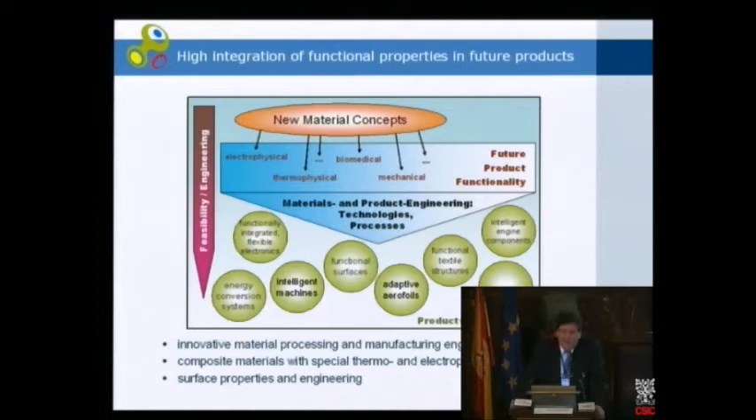And as a German citizen, I know quite well what I'm talking about. Therefore, in these few minutes this morning, I will have a close link to advanced ceramics in advanced mechanical engineering applications.

We had a short talk during the coffee break with Professor Moya yesterday, and the subject was how are new things, new material concepts getting to be a product and coming to the market. And with this draft, I will try to show you it's much more complex.

Material science is just one issue. We have plotted the engineering relevant in red. You see, it is a quite complex scheme how to create a product, but also how to bring it to the market.

And for sure, what we need is the human being, where we have the ideas, where we have the creativity, where we have the basic motivation.

But we have also to think about what is going on in the market. That means quite different disciplines that are not originally taught and learned by the material scientists.

And I want just to use these few minutes to make you a little bit more sensitive and aware what will be the challenge whenever you will come to a position in an industrial environment where you have to take responsibilities and not just producing papers and data.

Professor Kaplan, one of my colleagues in industrial management, he was talking quite harder than you did. He said, some of the papers we have here on the desk, their only value is their caloric value. That means when you burn them.

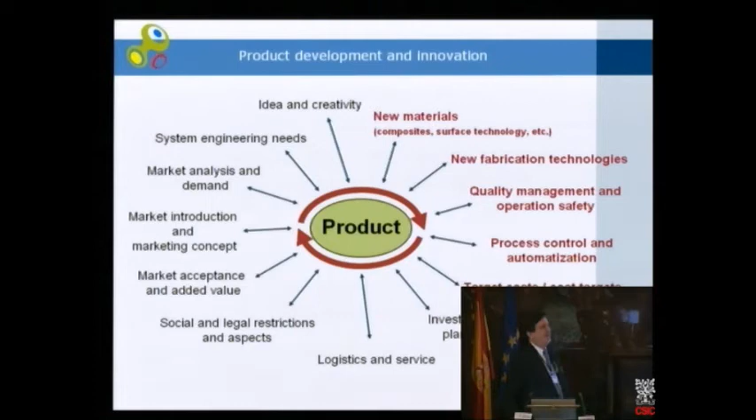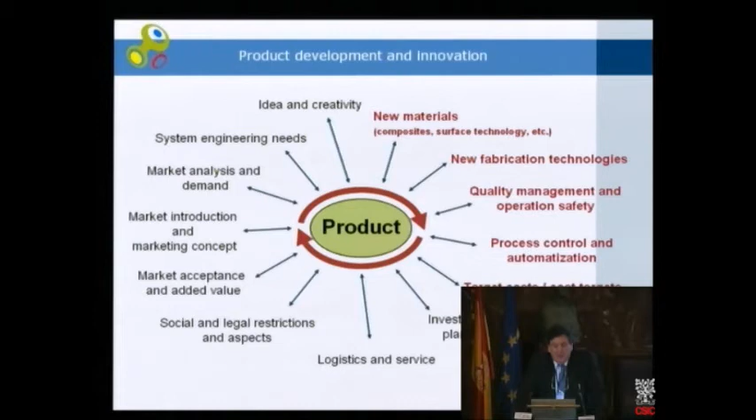And you all may be aware that we have to face similar problems if we are working with nanomaterials. We need special safety standards in handling, in compounding, and again for all the process chain. Why are people choosing ceramics? You all know about the advantages of ceramics. We all use these facts in our introductory remarks wherever we gave a plenary talk.

But on the other side, we have not only to face the problems with their brittleness. I will not take so much time with this subject. And we learned in a very impressive way about the importance of local stresses and stress distributions in the first paper this morning. But there is a different challenge, because in a product you have a geometry, you have a shape, you have tolerances of the material. It is not enough just to think about the material's properties, but about the component. That makes a big, important difference.

And therefore we have to work hard to develop the most appropriate manufacturing techniques, or the set of techniques we apply. And this for sure includes the compounding, the forming and shaping, and all the thermal process engineering. And last not least, what remains is the effort for the machining in the final state. That means in the sintered state, the handling of hard and super hard materials.

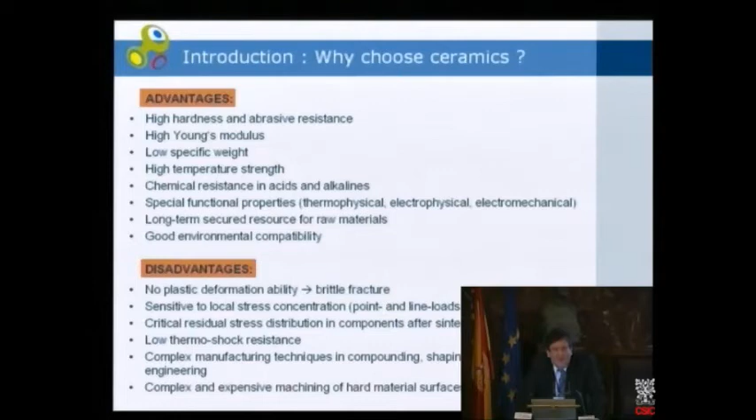And what is the reason for that? We all together have to share the responsibility for this situation, and that is the mismatch between the requirements of material science and engineering on one side and industrial product development and process engineering on the other side.

With all these drawbacks and risks in the application of structural ceramics, we have to think which can be the most appropriate strategies. First, to improve the mechanical, but also further specific properties of ceramics. And again, I'm not talking about materials, I'm talking about components, whatever may be their size or their design. And for sure, there is the classic approach, the microstructural optimization, and this is not old stuff.

We should apply some of the philosophy of Kaizen, the continuous improvement process. Sometimes we should be modest and also accept to achieve improvements by small steps. But many, many small steps give us serious progress. Not just big words, big challenges, and no achievement.

We have learned this morning about the incorporation of additional solid phases. I said it in a very abstract way here, because we can talk about ductile phases like metals, we have seen it this morning, or we can use the zirconia toughening effects by phase transitions, stress-induced phase transitions.

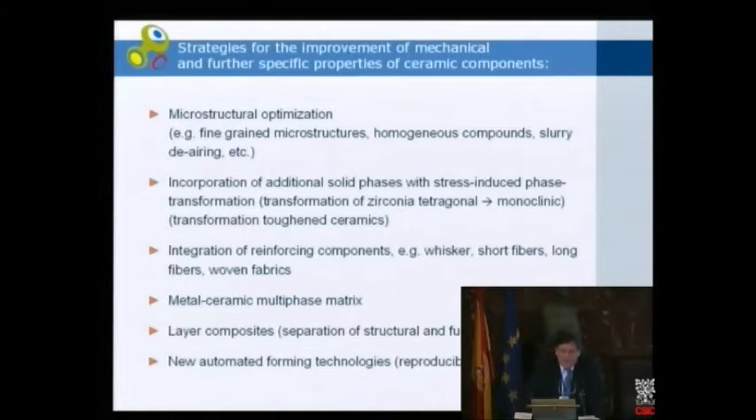As material scientists, you are well aware of these various strategies, just to keep in mind how the microstructures of these materials may look. The standard but modern fine-grained alumina as a structural material. Then we can have the structural refinement on the conventional track using submicron aluminas.

We can use a transformation toughening effect, and that makes it easy for me in the second presentation, as you are still sensitive to these oxide, non-oxide, micro-nanocomposite materials. And the same may happen in the combination of different non-oxide ceramics. So what remains is to think about the processing route.

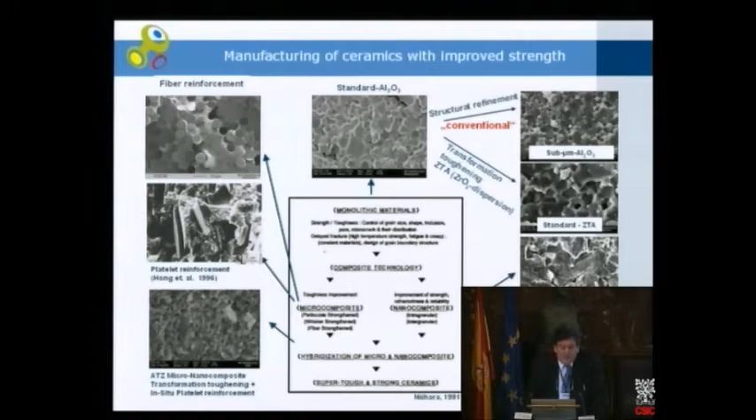And it is quite easy to estimate that for an endless fiber reinforced ceramic structure, we need completely different forming and shaping, and also compounding techniques, than for a traditional powder ceramic or powder metallurgical part.

So if we stay a little bit away from our own background in material science, and we try to take the coat of the customer, that is the person who should pay for our product, then we should summarize what may be the most important customer demands to ceramic components. And again, not to ceramic materials, to ceramic components. And for sure, there is the high mechanical strength, there is the good abrasive and chemical resistance, there is the high temperature strength, and hopefully the good creep resistance.

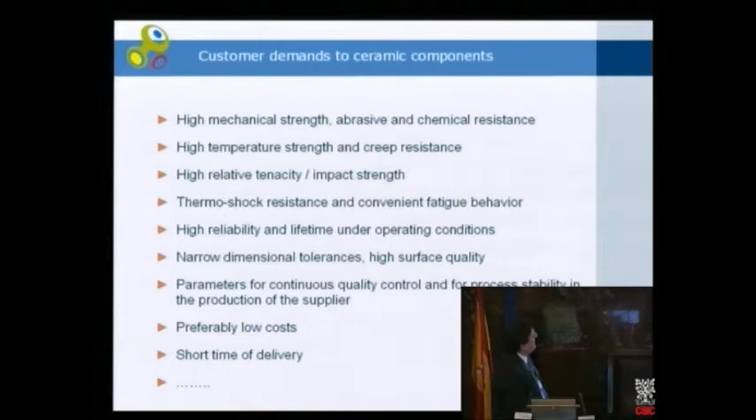And a little bit later we see we leave these typical material features, and there is such a word like dimensional tolerances, surface qualities. How to measure that? And you see, you need a different education, you need different tools, and you need a different understanding. And the second is to understand which are the key parameters in all these process steps of the process chain. And at the very end, we have to calculate the economic effect of all these means and methods we employ.

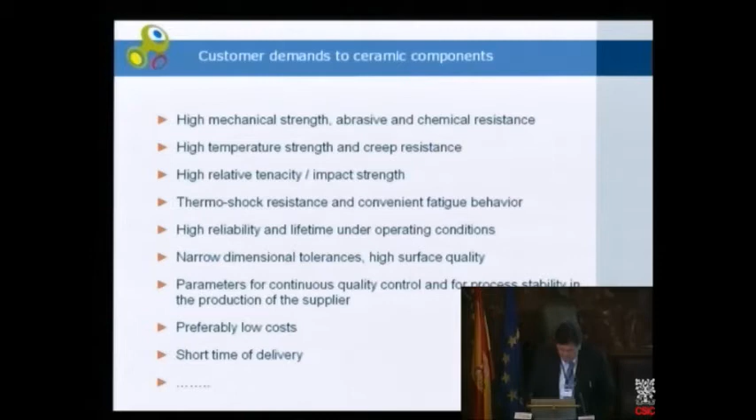And last but not least, we have to think about the time scale, not the time scale of crack propagation, that is another interesting matter, but the time scale, how fast the well-defined product will come to the hands of the customer. And this is not the end of the list.

So if we go to the other side, to a professional ceramic manufacturer, yes, he knows very well that he has to organize a cost-effective production to serve his shareholders, but he is also in charge to achieve customer satisfaction. The customer orientation is a key issue to be successful in international business affairs. And for sure, this includes a deep understanding of the specifications of my product and its quality characteristics.

But you may be aware it is a little bit more. It is not just the usual material properties. We are also thinking about data from a professional quality management, statistical process control data, for example. But the most important thing is, if we know the lot size, the design, the geometry, the set of tolerances, to select the most appropriate manufacturing process. Because in most cases, there are variants, you have alternatives, but you have to meet the best one. And I will try to show you in some little case studies how this may work.

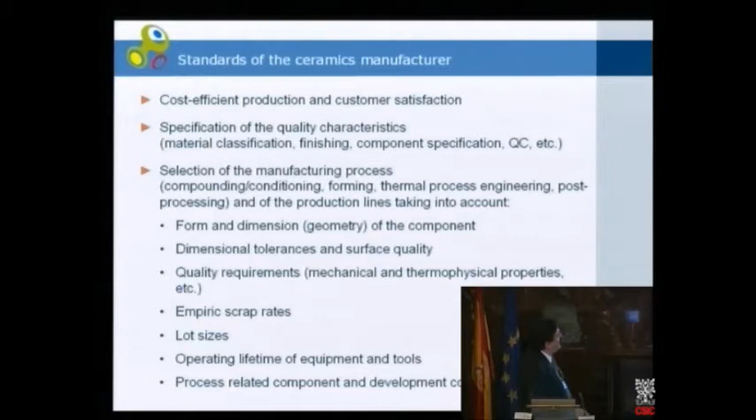And this also refers to questions like operation lifetime of our investment goods, of equipment, of the tools, and further technical components employed. And last not least, we have to monitor again every cost relevant factor in this process chain.

So if we summarize this, we have two fellows, and that is the main motivation for this presentation this morning, to bring these two guys together. And you see, here we have our material scientist, and he is educated and he is motivated, like in classic Greece, where we have the Olympic motto, not in Greek but in Latin, Altius, Citius, Fortius. Performance-driven. And you see they are dreaming of a tensile strength of 2,000 megapascals. They are dreaming of Weibull coefficients more than 30.

But look at this guy here. His eyes are different. He has the dollar sign in his eyes.

And here it starts. Sorry, we have no more French francs, je regrette. There are no more lira. I have not plotted the Deutschmark here because then we would get tears in our eyes.

But more important is that there is such a term like JIT.

It's not a parameter. It's a strategy. Just in time, just in sequence. But an important parameter, CPK, the key parameter in statistical process control. And if your CPK value of the total process chain does not achieve the 1.4 as something like a dimensionless number, you will never be accepted as a supplier. You can forget about all your understanding of your research.

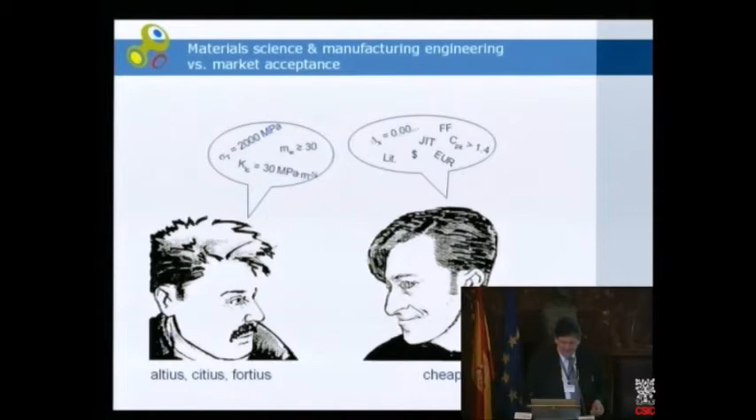There is no chance. That means such a simple, stupid figure gives you the benchmark how to organize your process chain, how to organize your factory, and how to create a high-quality, reliable product. And you see, he is summarizing in a quite different way. Not performance-driven, he is cost-driven. Cheaper, easier, earlier. You may say faster. And that is what I want to motivate you to think about if you are planning your career in the near future.

Now to the real facts in our business, the selection of the process route. We have different sets of requirements, and for sure there are the material properties, and I don't want to repeat so much the engineering criteria, but this set of requirements is in any case mandatory. Mandatory. And let me just look, in a very simple way, to the principal tracks we can go in manufacturing. We can use one of the famous pressing techniques, we can use a casting technique, or we can use plastic forming.

Plastic forming, immensely important in an industrial environment, and I am always disappointed how poor is the research effort in this field. The question is to make the decision, is it appropriate, yes or no, and is it feasible? So we end in a quite complex selection process, and hopefully we find it. Hopefully we have a solution. In some cases we may stand there with empty hands, and we may summarize we have to develop it really starting with a blank white leaf of paper.

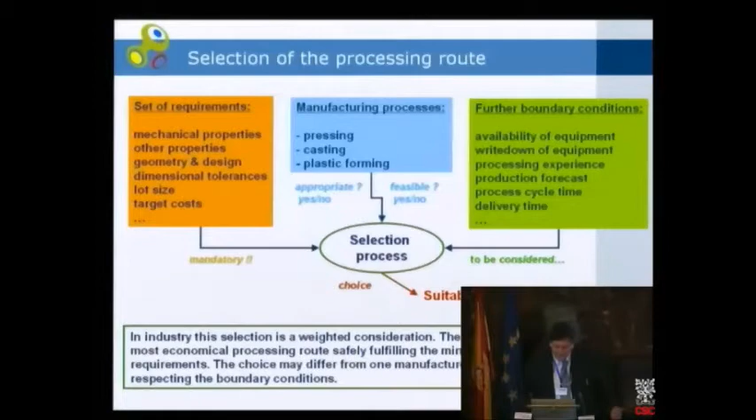Now a few words to the processing technologies. As I was asked to give some introduction to this matter, and you see how we organize it also in our general lectures: casting, plastic forming, and pressing. And for those who are not so familiar with that, you can also summarize it with an increasing content of solvent, may it be water or an organic solvent. Or you can also summarize it from the viewpoint of fluid dynamics and think about the rheological behavior of these various compounds.

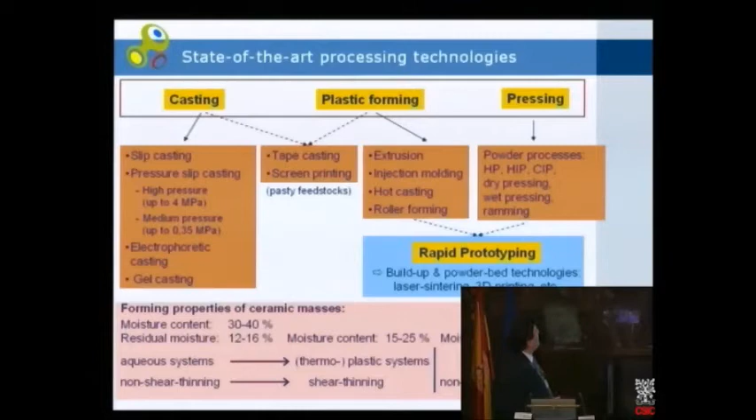In any case, we have a nice portfolio. And we have a nice portfolio that may be appropriate also for the processing of nanopowders. Dr. Kern and the further colleagues in this session will give you much more precise details to that. And we have some special techniques like screen printing, tape casting, special injecting devices. But very interesting, and we have a strong focus actually on this business: extrusion, injection molding, and also such techniques that are a little bit a hybrid to casting, like the hot casting as a special feature of the injection molding.

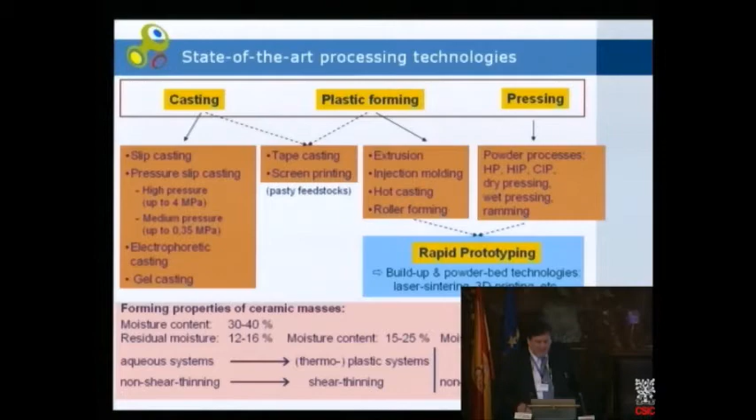And last not least, we have the pressing techniques. I did not include the SPS technique because I think this is a special subject. And last not least, there are the rapid prototyping process roads that play an important role in the initial phase of product development, but I'm quite skeptical that this will really be a long-term alternative.

So the casting road, everybody in the lab started with a nice form of plaster and learned how to make hollow products or bulk products. And it is a little bit more sophisticated to use a computer-controlled pressure slip casting machine. But for sure, if we have to produce a few thousand pieces per shift, there is no alternative. Otherwise, we should use all the center of Greater Madrid as a stock for the plaster forms, and this will not work for sure.

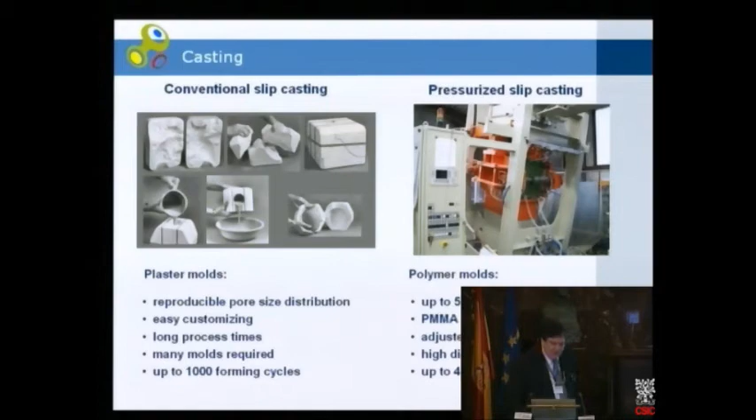From the viewpoint of the product developer, it is important which are the typical wall thicknesses I can achieve and how fast the process works. Sorry, there was no time to translate this in English, but you can just see the pressureless casting and the high pressure casting. It is half an order of magnitude or even a full order of magnitude in the speed of forming the material. Just to get a first feeling. But for sure, we have to make a decision that is well balanced. What about the investment cost of such a track in comparison to the traditional method?

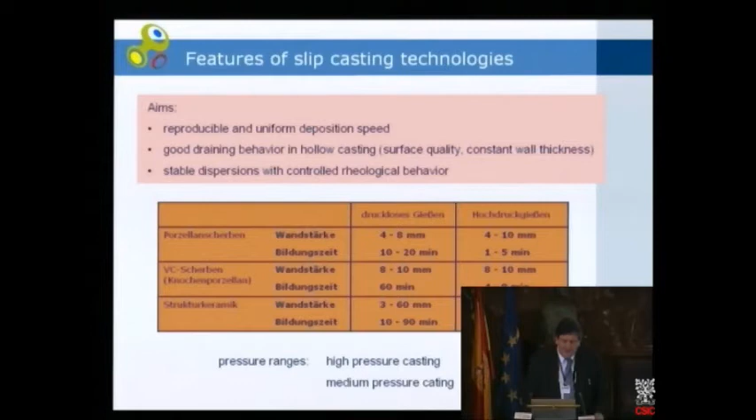And you see, there are general aims. We want to have reproducible and uniform deposition speeds because the complexity of the shape is an important factor. A simple plate, a simple cylinder, nobody will pay you a nice or effective price for. The more complex you can create the shape of your part, the more is the success you can have in business.

Now to the different scale, because the stabilization of our individual particles plays an important role, not only in basic science, not only in the laboratory, but quite important in an industrial batch size. And that can be a batch size of a few tons in some cases. And the homogeneity in a cubic meter batch is a different challenge in comparison with a 10 cubic centimeter glass batch.

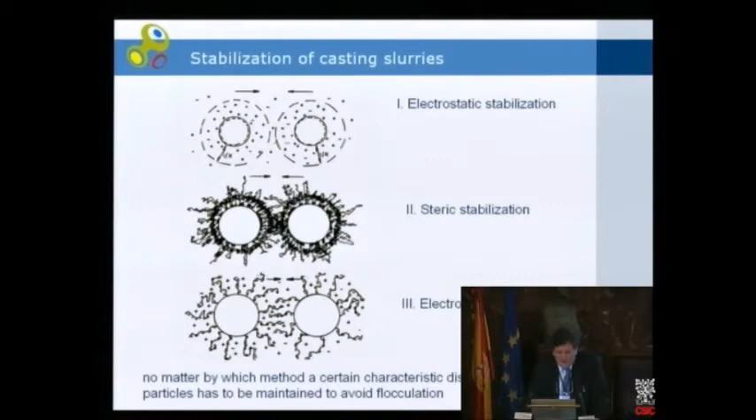Paul will give you more details to that. I will shorten that a little bit. But just one early experience when we started with the casting of far submicron nanopowders by traditional pressureless casting. And in about 25 years, we developed a lot of very well studied recipes how to achieve a very high content of solid. A stable suspension, but also a very high content of solid.

We learned so much about sintering yesterday, but without a high green density and a perfect homogeneity in green state, it is a hard job to compensate all the defects by the thermal processing. The better you are in this early state, the easier it is to achieve the final goal.

And you see, it was not so difficult if we came down from the traditional particle size in the submicron size, but as soon as the powders are smaller than 100 or 80 nanometers, there is a distinct drop in the achievable solid content. And that has a distinct influence and important consequences for all the manufacturing, because the lower solid contents lead to less favorable process characteristics, and the most important critical factor is the shrinkage during the drying operation, and for sure the high shrinkage rate to achieve full density of the final component.

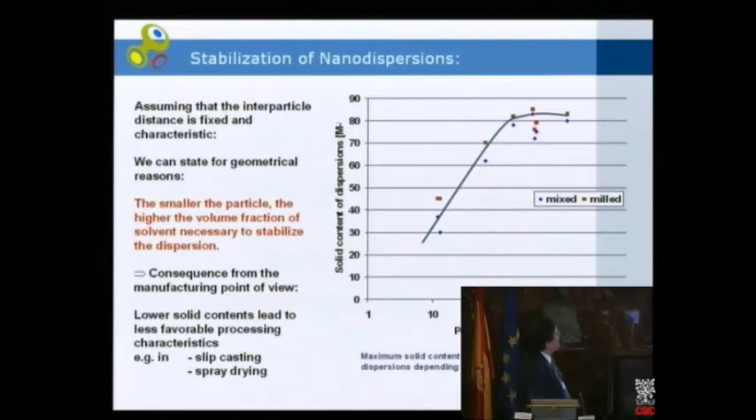That means the smaller the particle, the higher the volume fraction of solvent is necessary to stabilize the dispersion. And this is a clear contradictory approach for a manufacturing engineer.

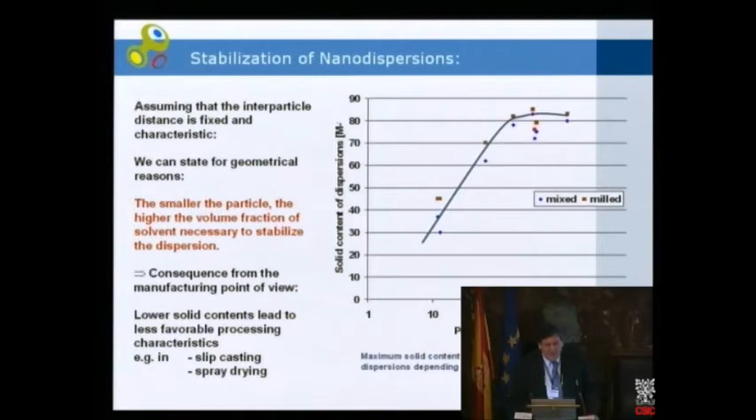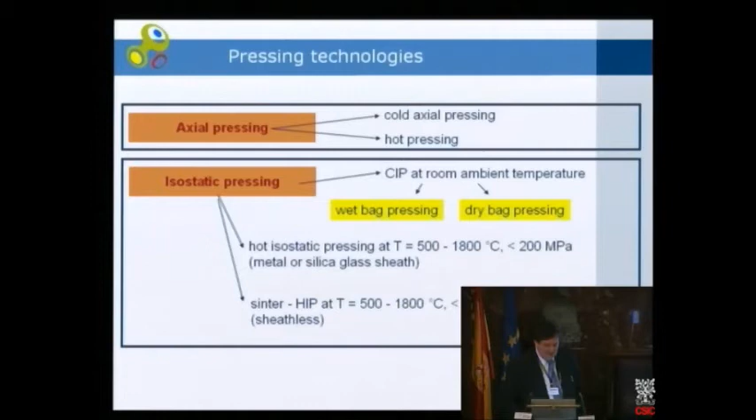Pressing techniques. Axial pressing: if you talk to Siemens, to Robert Bosch, the big players in the market, more than 90% of their ceramic components are made by axial pressing and cold isostatic pressing. It's easy to understand, but it's not so well known, because so many of us in the lab are in love with casting operations. But there are some risks with the pressing.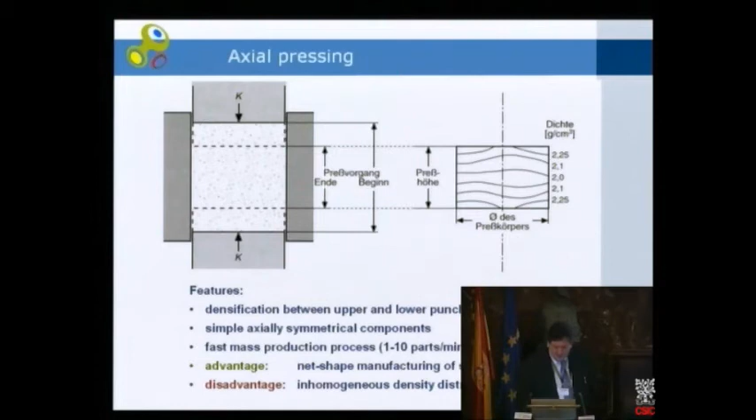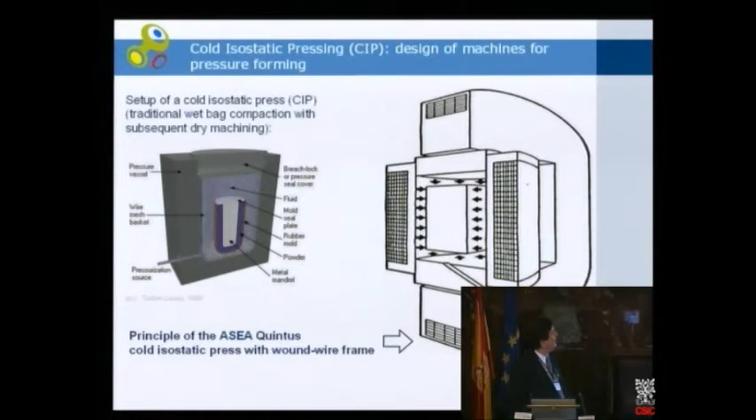With the axial pressing, we have inhomogeneities in the density, even if it is a simple geometry. And if we apply the cold isostatic pressing, it may happen that we have to face an investment far more than 10 million euros if we really do it in the large scale.

Nevertheless, cold isostatic pressing with subsequent advanced machining, we call it machining in green state or green machining, for many applications in mechanical engineering until now is one of the most performing manufacturing routes. Also related to the required material properties. But you see, there are different challenges. The material properties and the component properties may depend on such stupid things. If you change in a multi-stage machining operation, just positioning errors can kill your product.

If you have ultra-hard materials, you would like to work with an additional wall thickness or an additional dimension of just a few microns if possible. But this will not work if the tolerances you have in your cutting or drilling or milling machine are not appropriate to the product you want to make on these machines.

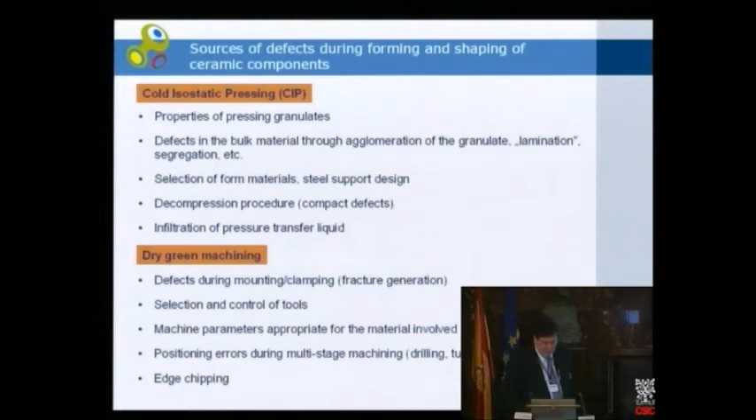And last but not least, we have to think about such stupid things like edge chipping. That is the entering and the leaving of the cutting tool in the material and the mechanical response of your ceramic in green state. Wow. And this is one of the reasons why a modern ceramist in industry has to develop or has to bring with his original education a deep understanding about polymers, because the chemistry and the technology of advanced binders is the key issue.

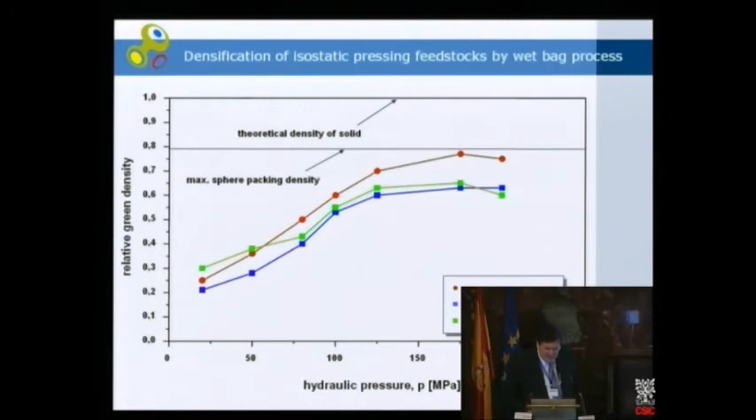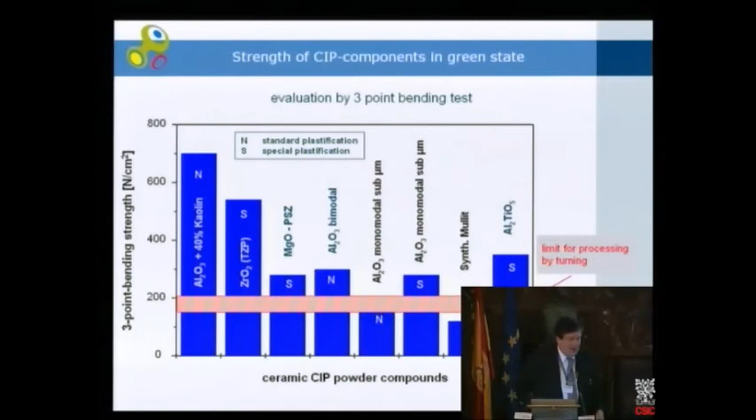And the reason is the surface chemistry, and this again should show us that the manufacturing engineer strongly depends on the knowledge and on the know-how of the material scientist. And if we want to have a product together, this is also true vice versa.

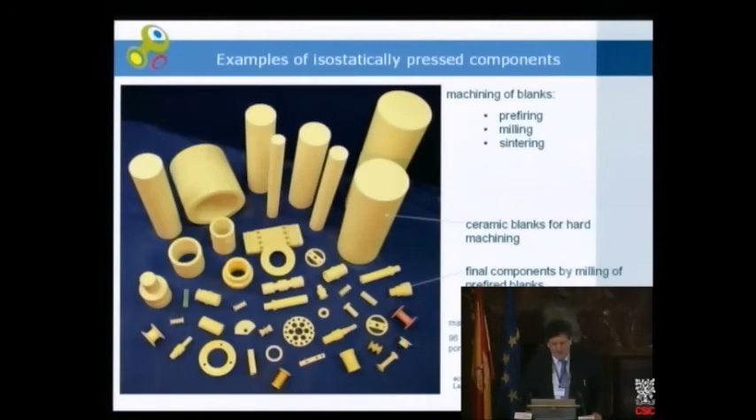So the portfolio of these products is quite a broad one. There are a lot of small and complex parts, there are larger parts, and there may be very huge parts. And I will just use this little case study. That was the first generation of the so-called European weather satellite, developed in the early 80s in Germany, and the requirements were clear. There is this large ring structure with a total diameter of about 80 centimeters.

And with this diameter, you may guess what the dimensional tolerances are to have a very precise ring structure with such a thin, relatively thin wall thickness. What you cannot see from the chairs behind is that this structure contains 1,200 micro holes, micro bores. How to produce such a part?

There was only one supplier who could fulfill the requirements, and this was made by cold isostatic pressing of a full solid block. More than 95% of the volume was cut and drilled away, and the scrap rate is always a secret. The most important thing was to bring out 6 correct parts that could fulfill the requirements and specifications. But you can see, to produce this part in green state, you need a cold isostatic press with a diameter of about 1.5 meters.

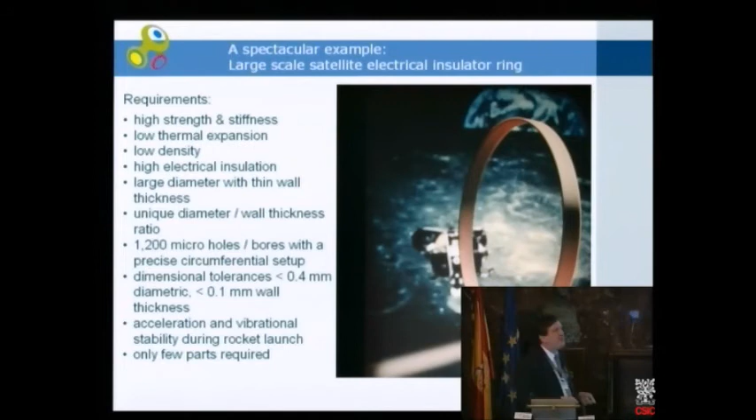What does vibration mean? Professor Kaplan made a remark about 3-point or 4-point testing. This is a static test. This is a single event. To use a ceramic with high cycle fatigue, 100,000 load cycles, that is the real challenge. And this is one of the reasons, which many people never speak about, why ceramics are not so easily accepted by mechanical engineers for a dynamic machine system.

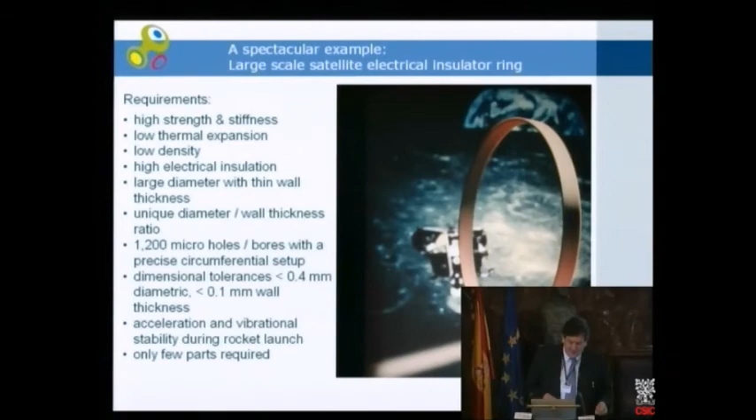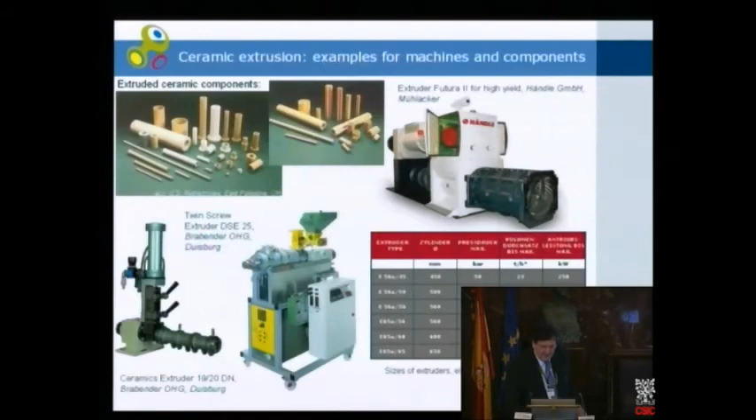Injection molding. With respect to the time, I will reduce that. Frank will tell you about that a little bit later.

So before I come to an end, another important case study. That was my early beginning when I finished my career as an assistant professor at Karlsruhe University. My company was in charge of developing high precision ceramic tubes for an application in this well-beloved country, in southern Spain. And this is not photovoltaics, this is focused solar power, thermal power. So this is the concept of the famous Plataforma Solar in Almeria. And the focus of this huge field of mirrors is in the center of this tower here.

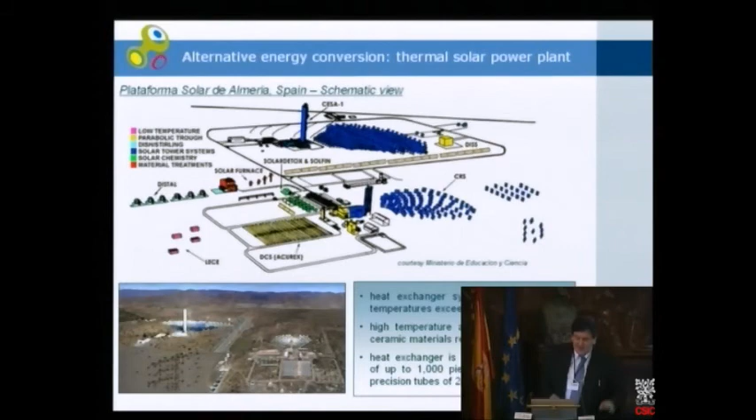And the challenge was to develop a heat exchanger that can work with gas temperatures on the surface up to 2000 degrees C, high temperature and oxidation resistance. That is really extreme applications. But the problem was not primarily the material. The problem was that a heat exchanger with such an extreme load needs absolutely precise, straight, and perfectly round tubes. And in this set, there were about 1,000 pieces. I make it short, only silicon carbide, at least at this time, was the appropriate material to develop the technical solution.

Here you have it a little bit in higher magnification, how it looks in the center point of this heliostat, and the thermal power was about 60 kilowatts, not on the primary side, but on the output side. But for sure, this sun kiln did deliver steam.

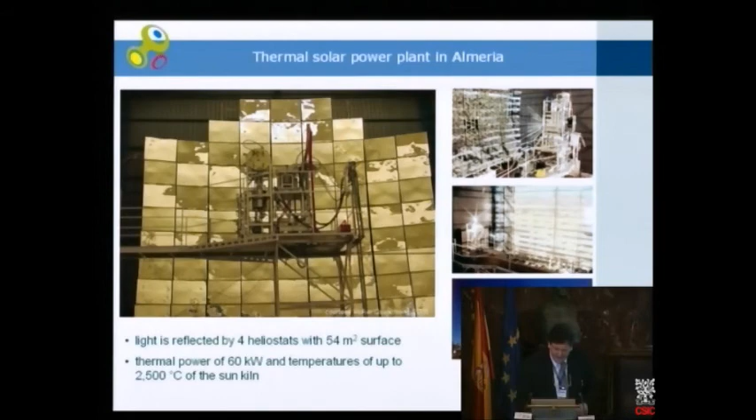Yes, which are the materials? Everybody was in love with hot-pressed or hot isostatically pressed material. Can you tell me who has a press for a tube of 2 meters length? No. The solution was a relatively lousy material, if you just focus on the material's properties. Silicon infiltrated silicon carbide. One handicap: we must stay at a safe distance from the melting point of the silicon.

That was the ultra fine-grained material developed in Harwell by our British colleagues for their nuclear power plants. At the time, it was the finest silicon carbide material that was reaction bonded or siliconized. And the advantage in mechanical strength was quite impressive. The question was, can one or more of these materials be processed in the shape of a high precision tube?

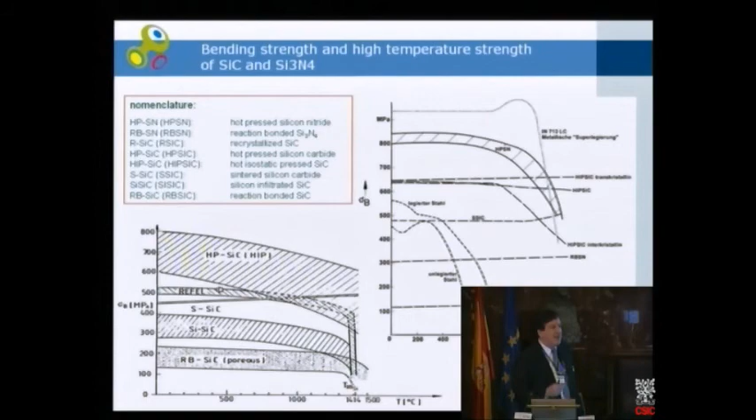Of a high precision tube. And for sure, to produce a tube, you select the extrusion technology. That means you have to develop a performing extrusion feedstock, a compound, to adjust the plasticity and to adjust the viscosity. But what counts at the very end is the form and dimensional stability and the stiffness of the extruded part.

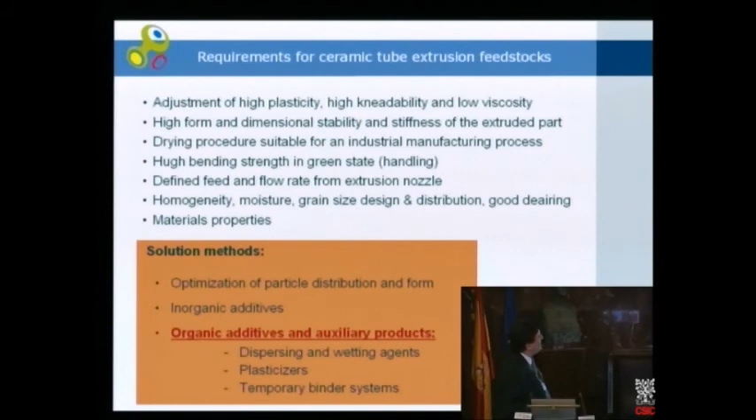In a second, I will show you the hard facts about the dimensional tolerances of this material. You all know silicon carbide has absolutely no plasticity that can be exploited for forming and shaping, and we can hardly use a distinct amount of inorganic additives. That means all the plasticity, all the rheological behavior, and the strength and handling safety in green state must be performed by a set of optimized organic additives, binders, plasticizers, and further auxiliary products like dispersing and wetting agents. The most important are the temporary binder systems, temporary with respect to the thermal treatment, to the sintering, or to the reaction bonding.

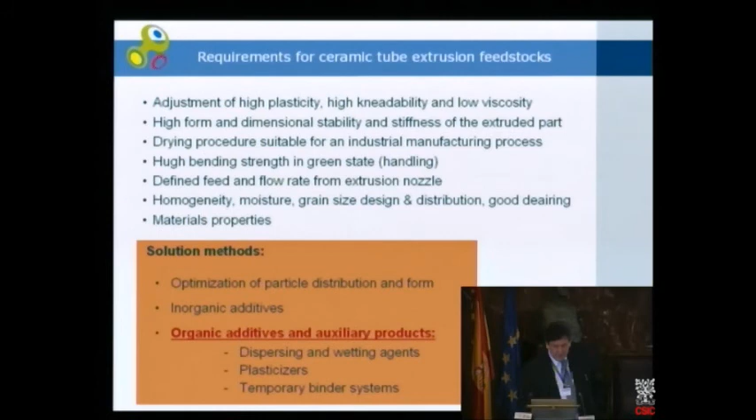Everybody knows extrusion can be done with a piston machine or with a screw machine. A screw machine leaves you always with a texture in the material, and this texture really may be the memory effect of the screw and the flow behavior during the extrusion operation.

So after we had worked for about a year with the most sophisticated, most expensive screw extruders, one of the most experienced masters in the factory said, 'Oh boss, forget about it. Let's try to use a piston extruder.' A piston extruder.

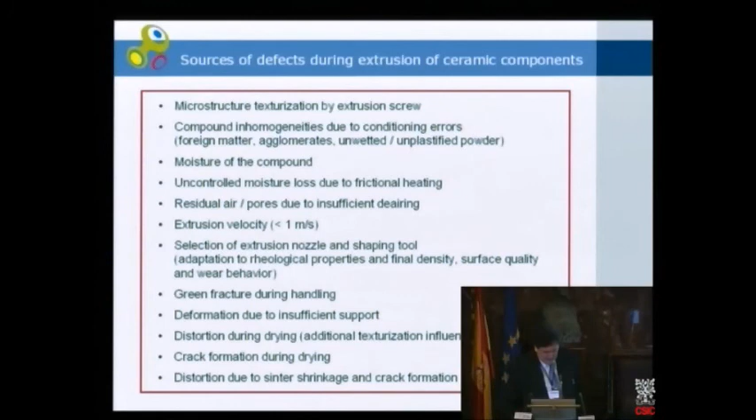Not so much details about it, just to show you the end of this product development. There was a parameter called TIR, total indicator reading. This summarizes the bending, the curvature, the ovality by a turning measurement, high precision measurement, tactile measurement on the tube. And the original specification was to achieve 1 millimeter length per 1 meter length of the tube.

That's where we started, and even in the early phase there was no competitor. And that's where we ended.

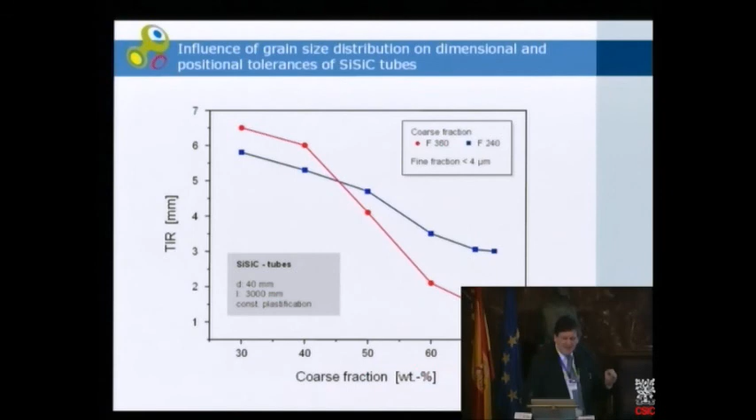If somebody would have told that to us 1 or 2 years before, maybe somebody would have fired him. But that was the solution, and this is not only true for the reference project of the solar power plant, it is also true for a complete product family of ceramic heat exchangers. So this example should just serve, it should not be representative, just to give you a certain sensibility that the problem of precision of the component is a very decision-making point in all these advanced materials.

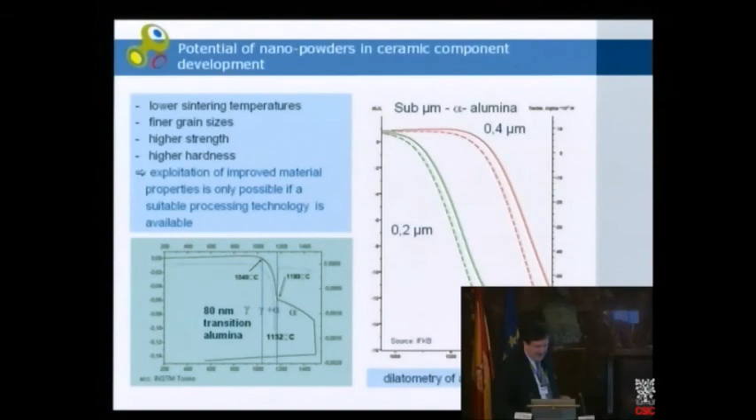And now, before I come to the end, just a very few words to the nanocomposites. Because our primary aim and scope, and this has not changed until now, is we want to exploit these general forming and shaping methods as far as possible to create structural ceramic materials, ceramic components, by the application of a new generation of powders and further developed or even novel forming and shaping processes, because we think that there is an interesting window for materials with superior properties.

And I don't want to make further references to our esteemed colleague Niihara, but with respect to time, allow me to summarize that the challenges in manufacturing of ceramics are a little bit different to the original aims and scopes in the pure materials development. And this is a traditional conflict between engineers and material scientists since half a generation at least.

But for the near future, we should learn from this disaster of the past. We should bring together the people, and from an early stage, they should have a common commitment that this new generation of forming and shaping technologies, all the important steps in the process chain, should be fast, should deliver a product with very narrow tolerances. That means a clear net shape strategy. I think Frank will go in much more detail in this field.

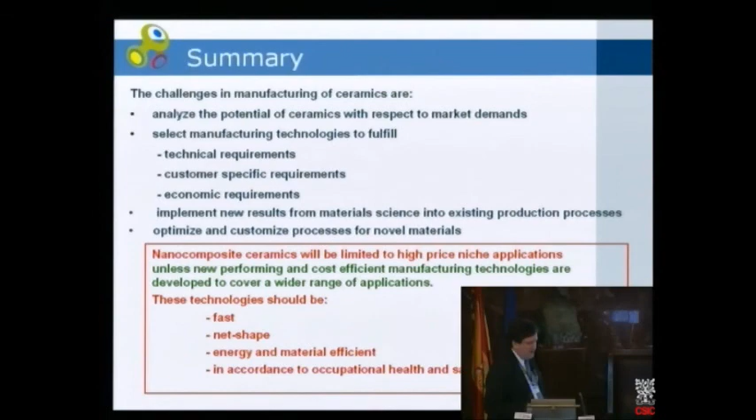And we have also to work in an energy and material efficient way. Energy and material efficient way. The challenge to save energy is one of the first strategic approaches in the modern industries, and the factory of the future will have a completely different energy balance than whatever we have seen until now. Last not least, we have commonly to carry the responsibility for the occupational health and safety requirements in the handling of nanopowders. Thank you for your attention, and we enjoy the further discussion.